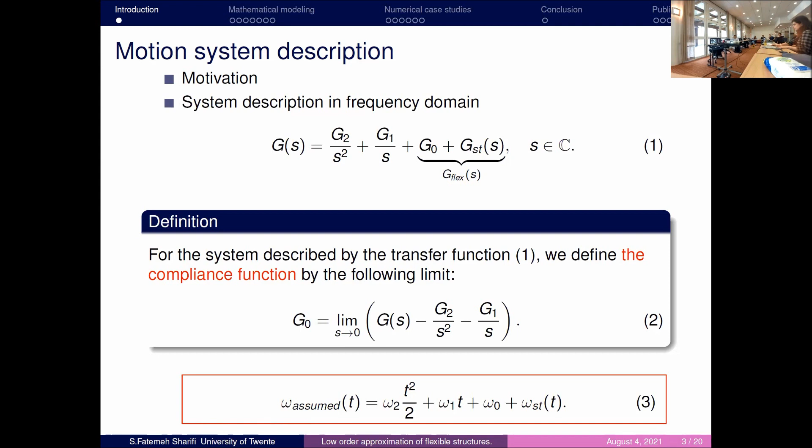In the first part, I will work with equation number 4, which has a damping term, and then I will investigate calculating the compliance function for these systems. First, we consider that our state space is a Hilbert space, and our A0 operator is a non-negative self-adjoint operator, which has a compact resolvent and also with initial boundary conditions, and the boundary operator is inside the domain.

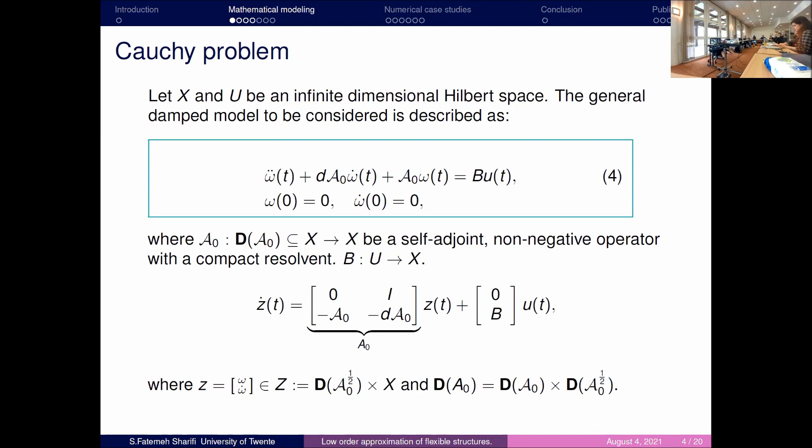And like other second order systems, first I reformulate it to the standard system on an extended state space, and then by checking the semigroup property of this equation, it can be guaranteed that for every initial condition, we can get a unique solution for Z and correspondingly for omega and our solution.

And for developing the approach, first, since the operator has a compact resolvent, we can consider that our space is spanned in the orthonormal basis functions of the operator, and then by using the constant input on the domain of our systems and considering the predicted solution, we get this set of equations for each of the solution components. And the aim is to calculate omega 2, omega 1, and omega 0. And omega 0 represents the flexibilities of the systems.

To start with, first, we assume that phi 1 to phi n lie in the kernel of the operator A0, and they arise from the 0 eigenvalues. And then we can see that the first equation gives us that omega 2 is in the kernel of A0, and so it spans phi 1 to phi n. Similarly, for the second equation, we get the similar result that omega 1 is in the kernel of A0.

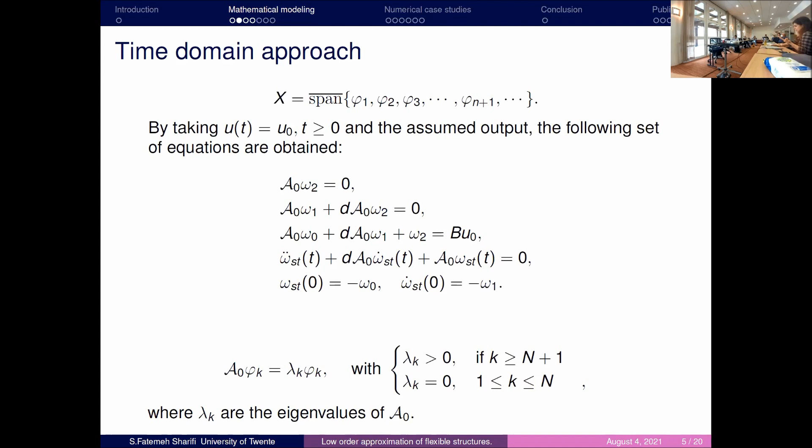For the third equation, we can see that omega 0 as a compliance function is the initial condition for the stable part. And by considering this, we can claim that omega 0 is also a stable and static response of the structural dynamics. And then, by using this condition and using the orthogonality of the stable and unstable part, we can calculate the solution structure uniquely.

Where you can see here that, as we checked, omega 2 is a function of the orthonormal basis from phi 1 to phi n, omega 1 is equal to 0, and omega 0 stays in the stable part. From this part, we can get an impression that omega 1 can be neglected, while in the second part, we can see that this function plays a role in the frequency domain approach.

As a second part, for the evaluation of my method, I used the frequency domain approach for checking the components that I gained from time domain. First of all, I checked in the Laplace domain and calculated the transfer function, and then by considering the output, not the transfer function, we can get this equation, and then by applying that the solution is in the Hilbert space, we can get that omega of S is a function of the orthonormal basis, and by using Fourier expansions of the solution, I can get the solution in this format.

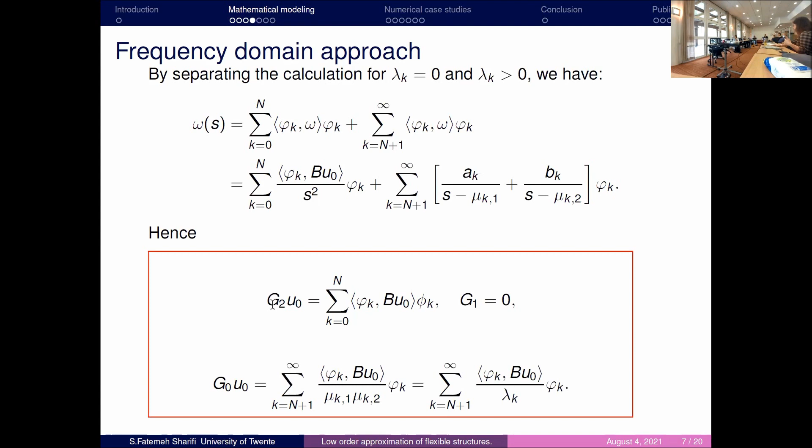And then by separating the eigenvalues of the stable and unstable part, the components of omega of S can be determined in this form. And of course, by checking the variables identified here, I can get that G2, G1 and G0, which represent omega 2 and omega 0 in time domain, yield identical results as we get in the time domain. And in these examples, we can see that the amount of calculations can be reduced significantly in time domain, while in frequency domain we had difficulty dealing with irrational transfer functions.

As a second case, I studied the boundary control problem, where the control input is located on the boundaries of the domain, and here again we consider a damping term. As a first step, I define a new operator, including the domain of A and the intersection with the kernel of a boundary operator. And then by defining B, a bounded linear operator with these properties, we can claim that this equation is a boundary control problem, and by defining a new variable, we can solve for the V variable, and then consecutively for the omega parameter.

And of course, here we consider this equation for the relation between the A and A0 operator, where Q is a linear operator from the domain of A to U as the input space. And then we can claim that if V is a classical solution for this equation, omega is as well a classical solution for this equation, and we can continue with the method that we used in the time domain approach for the Cauchy problem.

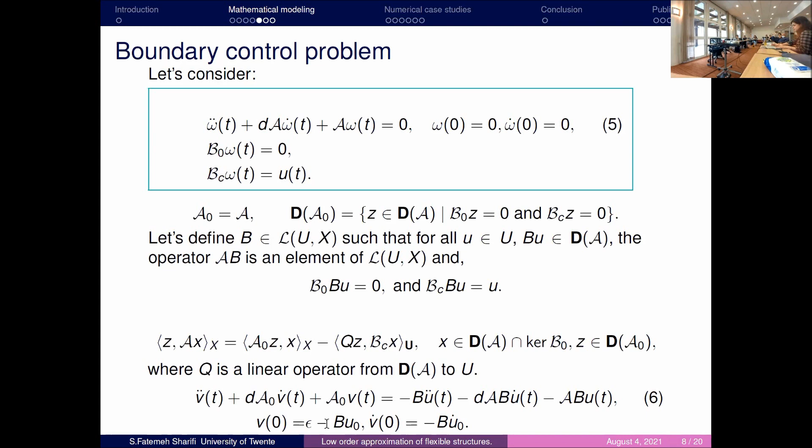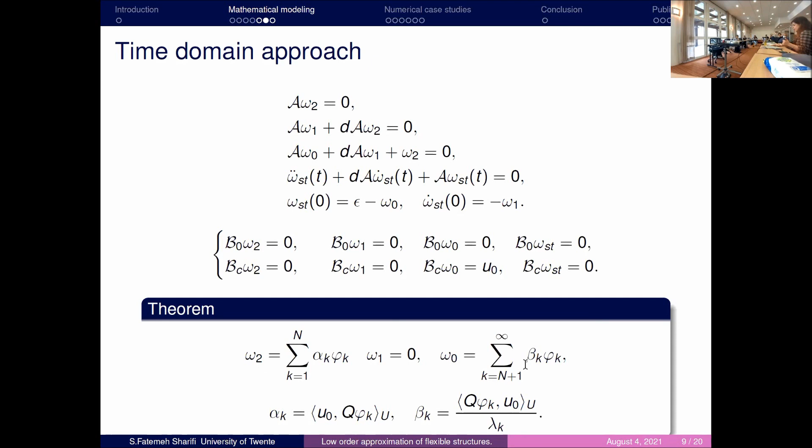So by assuming a classical solution, we do a similar procedure for the boundary control problem. And here, with non-homogeneous boundary conditions, I can get the solution components and solution structure in this format. And we can see that the solutions are as expected: omega 2 lies in the unstable part, while omega 0, as our main goal, stays in the stable part of the solution, while the coefficients of the solution components come from the Q operator, which comes from the boundaries of the domain.

Here in this section, I evaluate the results for the boundary control problem with a frequency domain approach. And similarly, I check the transfer function from U to omega from the previous equation, and then by checking the Fourier expansions and orthonormal basis of the solution, I checked the omega of S to find out the

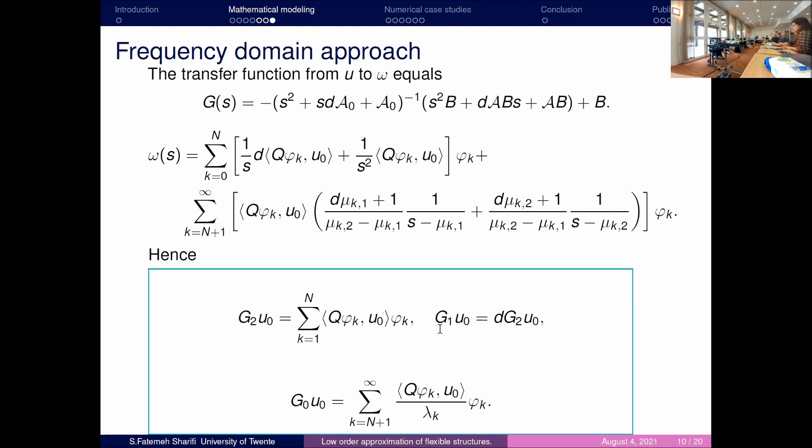components separately. And here I get that the solution for G2 and G0 are similar to the part that we gain in time domain in our proposed method, while G1 comes non-zero. We found this in our examples, which I explain later. This G1 as a non-zero part will affect the frequency domain approach, because the initial conditions for the velocity term may not exist. In the next part I studied two examples.

For the first one, as a starting point, I use the one-dimensional wave equation, where our operator is the second order derivative with respect to x, and the input is applied on the boundaries. For the time domain approach, which is a quicker way to calculate the structure of the response, as we propose in the theorem, we get that omega 1 is equal to 0, and for omega 2 as a mass or inertia function, we can find the solution simply by solving it for the one-dimensional case. For the third one, we get omega 0 not uniquely, and with the extra condition that we propose in the theorem, we can find the solution uniquely, and that was the contribution of the time domain proposed method.

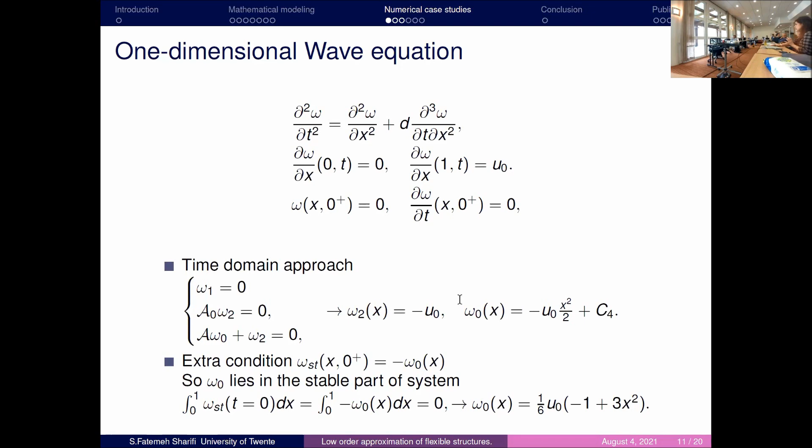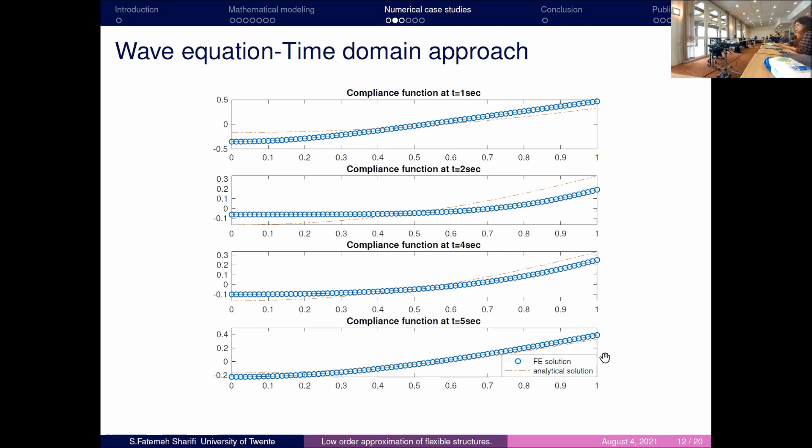In simple words, for the one-dimensional case, since omega 0 is in the stable part, it does not grow through the intended interval, and by applying this condition, we get the unique compliance function. But for higher dimensions and more complicated PDEs, this can include calculating the eigenvalues and eigenfunctions of the systems. Here is shown the calculation of the compliance function with the time domain method and the numerical finite element method, which shows that after stabilizing the systems, the results are identical and consistent with each other.

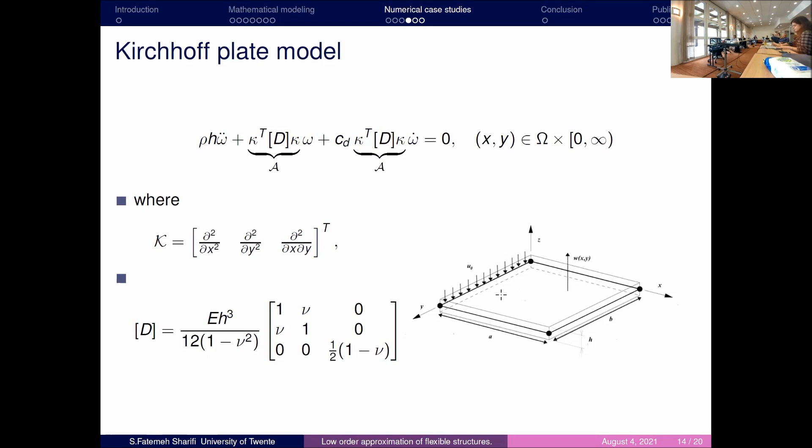As a second example, which was our main goal, I studied the Kirchhoff plate model, where the operator is the self-adjoint bi-Laplacian operator and D is a physical property. We studied it numerically considering all of the coefficients, and our control input is located on one of the edges of our plate. Since the frequency approach becomes quite complicated, we studied the time domain approach, considering the set of equations.

Can I continue? Just go on. Okay.

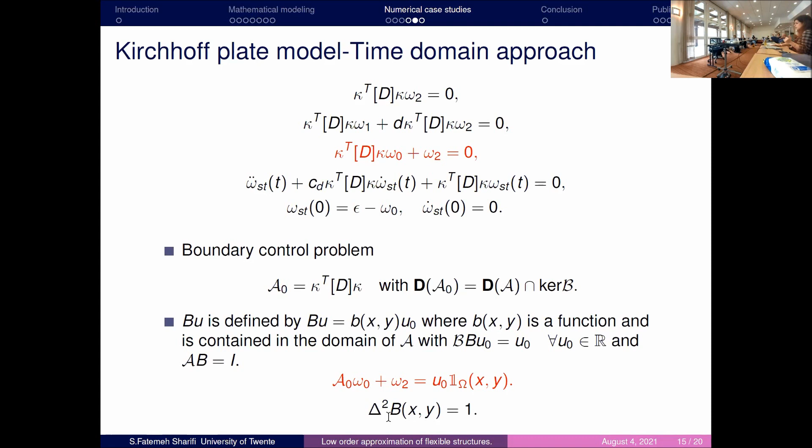Considering the set of equations, the third equation, which includes the compliance function, needs to be checked as a boundary control problem, and there I define a new operator and also B. Then for solving this equation, I switch to the numerical part for the Kirchhoff plate equation, and for B, we guaranteed that the solution for this specific example exists, and we can claim that it is a boundary control problem.

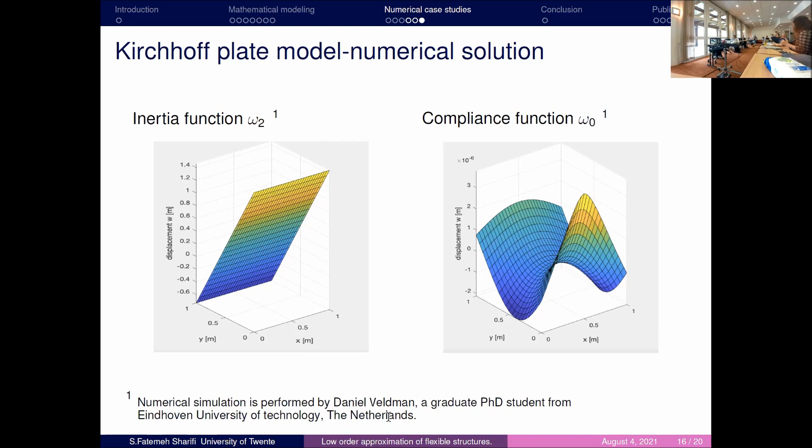For this part, I studied with the finite element method, and for the inertia function, we get this numerical plot. And for the compliance function, we get this type of deformation for our plate. By checking these functions, we can fully determine our solution in low frequency, and it can be used for feed-forward control designs.

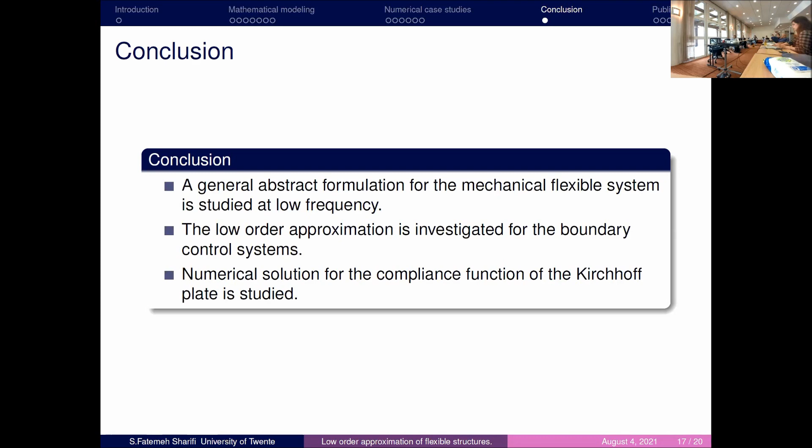To wrap up, in this presentation I checked a general abstract formulation for mechanical flexible systems at low frequency, I studied the low order approximation for boundary control problems, and lastly I studied a numerical solution for the compliance function of the Kirchhoff plate.

About my dissemination activities, my last publication was presented at the IFAC World Congress, and now I am completing and preparing my reports for submission to a journal. I also presented at the European Control Conference in 2020. About my secondments, unfortunately I could not complete my last secondment in Warwick.

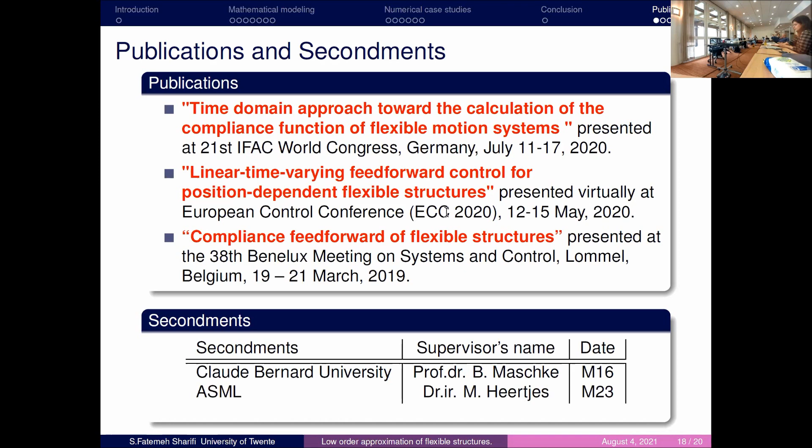About my next journey, I would like to continue research in academia, and of course, I am eager to have a research and development position in industry as well.